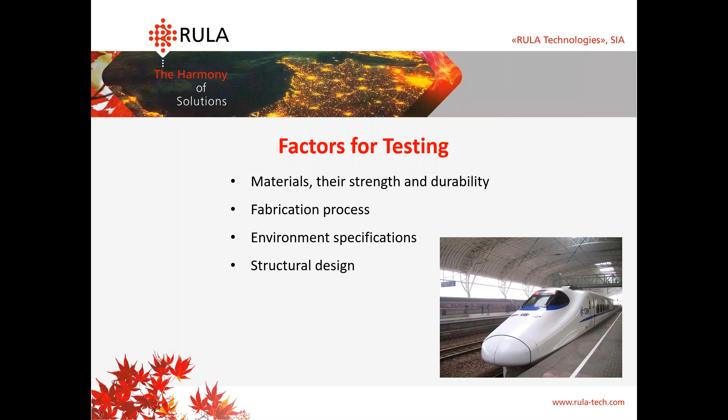There are three main ways of vibration testing in the railway industry. The first one is regular single shaker testing. It's used for single static parts like trunks, mounting, body parts, electronics. Multi-shaker testing is used for moving parts like rolling stock. And of course, we need to have an ability to apply modal analysis for structural design. It can be applied to single parts or a full train with a lot of sensors, and that way we can check the full production of the train and its parts.

Now let's talk a little bit more about the standards. The first one is IEC 61373, which certifies the equipment related to the railway industry and railway rolling stock. It guarantees resistance to shocks and vibrations. This standard has three different categories, which represent testing different parts, and these parts are separated by their train mounting. The first one is body mounting parts, the second one is bogie mounting parts, and the third one is axle mounting parts.

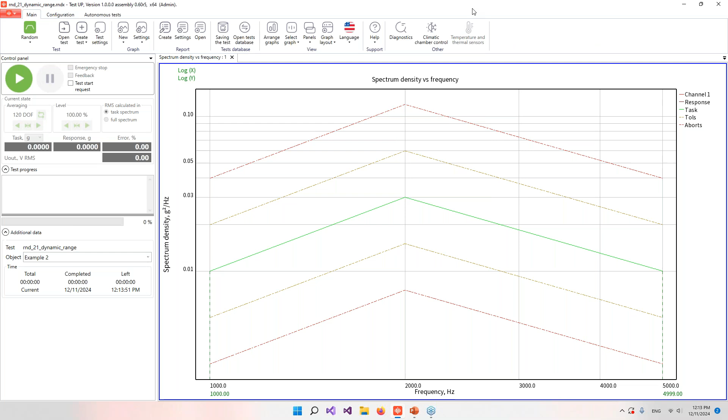And I think now we can switch to our software. And I'll turn on the camera.

Here you see that we're using our regular setup. We have our shaker with an extended shaker table, and a train model mounted on it, fixed in place. There is one accelerometer in the center of the shaker table, and another accelerometer mounted on the train. We're using a regular RL-C21 controller and RLA 200 amplifier.

Our sensors have a sensitivity of 10 millivolts per G. And here we have our software. Our first step is to create a sensor configuration.

Let's go to the configuration tab, go to channels, and add a configuration. Its name will be webinar test. Here we enter the sensitivity of the first and second channel, and we don't need settings for the third and fourth one. Their type is IEPE, so let's apply it.

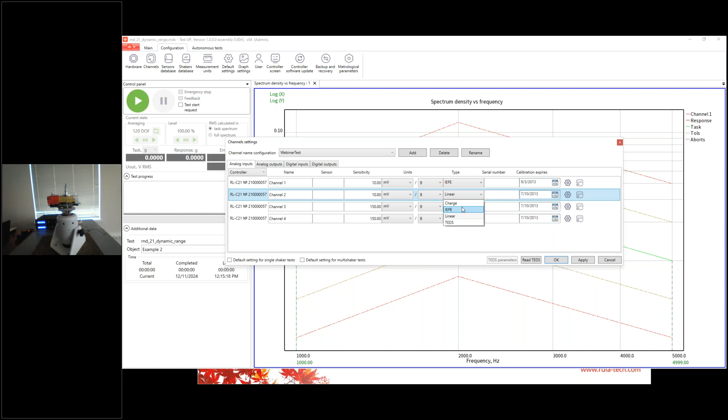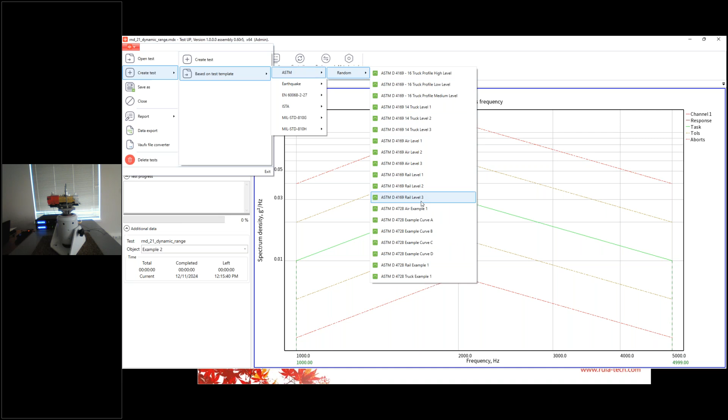Firstly, we will run a random test. It will be created by template, so we press the RULA icon, and here we have create test based on test template. We're using ASTM random rail level 3 here. Press OK.

Here you see the default profile from this standard. After that, let's go to limits and check our shaker. I think we won't run from such low frequencies.

We will move them a bit. And here you see that we have a rather low level. We'll recalculate it, but before that we need to select our channels.

Here in the channels tab, we select the webinar test configuration and disable the third and fourth channel. After that, let's apply the settings. Here you see our displacement is now in the green zone, so it won't cause any damage to our selected shaker.

After that, here I want to have an RMS of 1G, so I enter 1 and press recalculate. Here we have our profile based on the ASTM D4169 standard. It's a rail test. After that, we press OK.

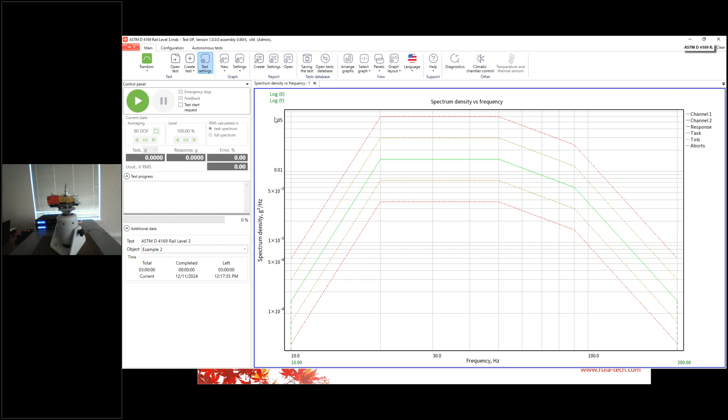And I need to set up the gain on the amplifier. Let's double check the settings. So here we have a 3-hour duration, which is too big for us. Let's set it as 1 minute.

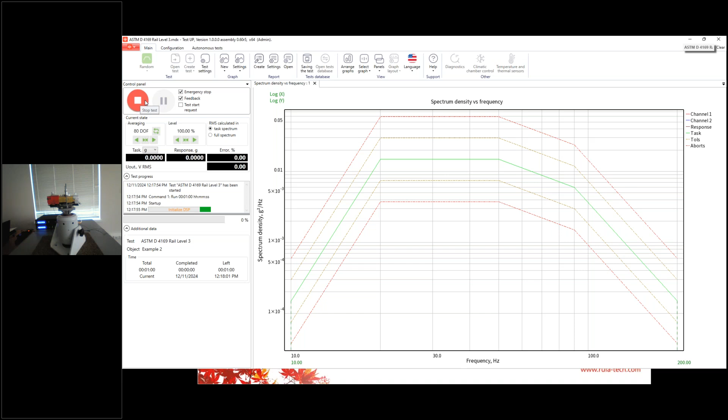And I think now we're ready to start the test. We're starting up now. I need to say that this test is really loud, so I think you will hear it.

Yeah, you see that we are running. I think you can see the vibrations. And our startup is complete.

Let's create more graphs. And you see that on the second channel, which is blue, we have a spectrum increase here. And I think maybe we will have a resonance if we go and turn levels up.

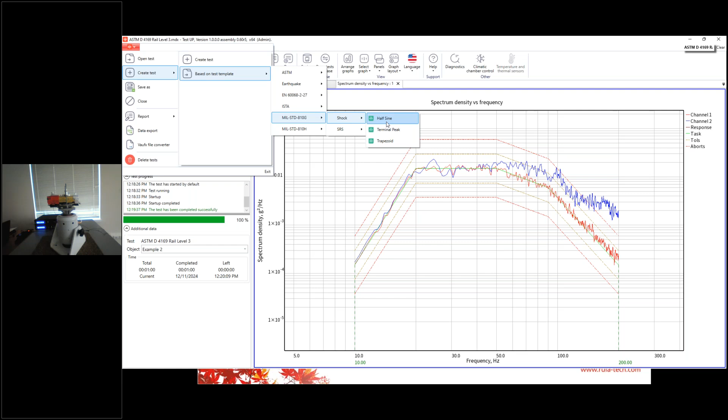Let's set a lower amplitude, it will be 1G, but I think if we need, we will manually change the amplitude. And let's make 50 shocks.

And set manual mode. After that, we go to limits, check the shaker, and you see that abort and tolerance are calculated according to this standard automatically. You will see it on the graph.

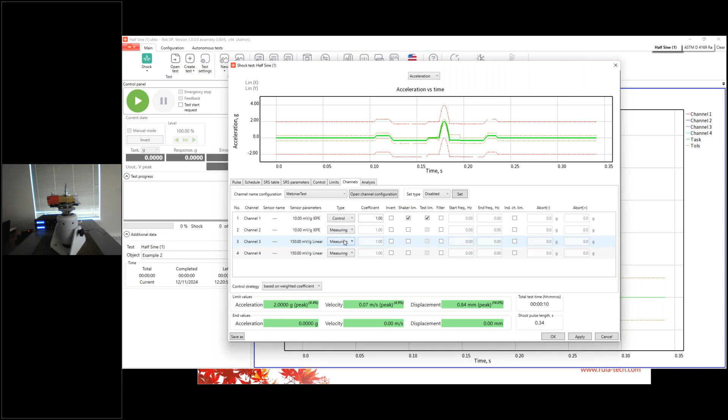After that, in channels, we select webinar test and disable these two channels. Here you see that these lines above and below the task level are calculated according to the standard. And now let's start the test.

Now we can perform the shocks. I think we can set a higher level. Let's set it back to 2G by entering 200% here.

So like this, let's create another graph. So you see that on the first channel we have our task level on the peak acceleration graph. Here we're running about 2G level, and the sensor on the top of the train has something like 7 or 8G amplitude.

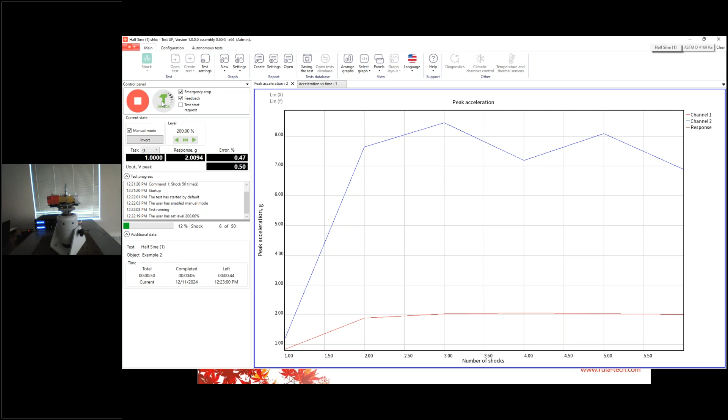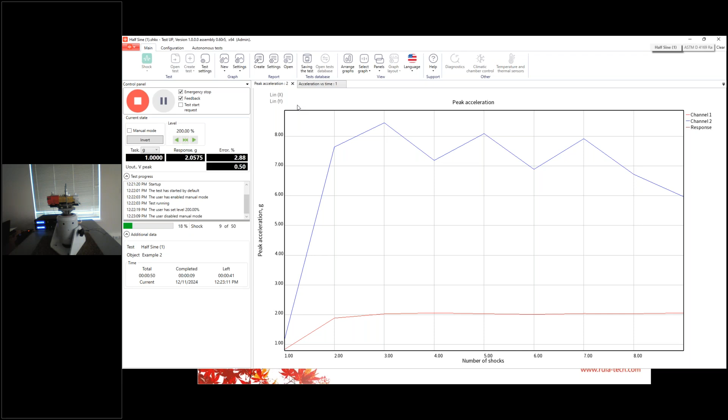And now I think let's start the test in automatic mode. Here we disable this button and we start to perform shocks in automatic mode. And let's create a spectrum.

Here you see that in frequencies above 100, the second sensor has a higher signal than the first one.

And now the test is finished and we can switch to another test. It will be sine. We will create a simple profile, but here we will go from 100 Hertz to higher frequencies and maybe find some resonances.

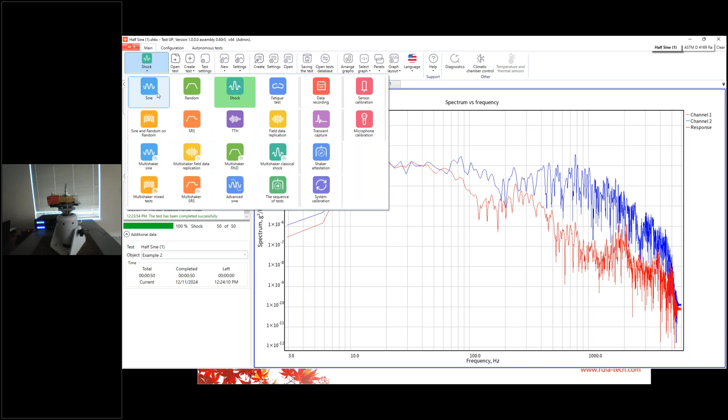So we switch to sine. Let's create a new test. Here we enter 100 Hertz, 1G level. We will go up to 1000 Hertz, also 1G level. We will run the profile.

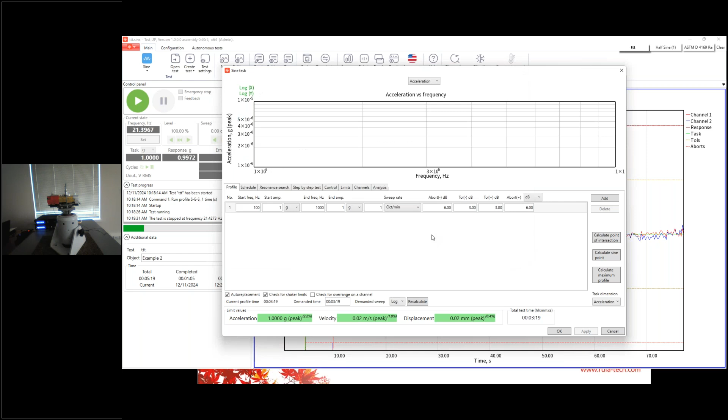Here in the channels, we need to switch to our configuration, disable these channels, check the limits, and I think now we can try to run this test. So let's start.

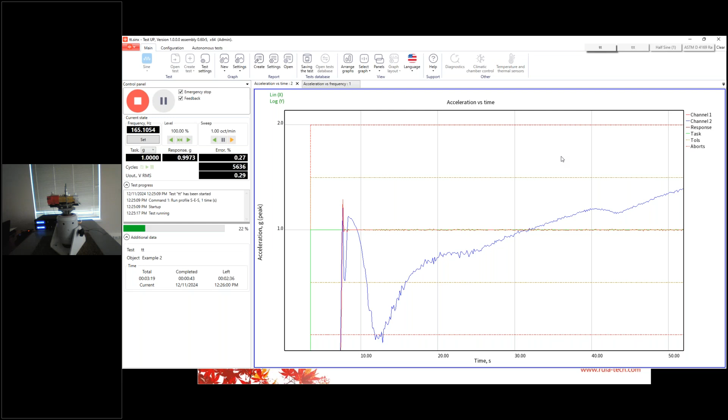And you see that the second channel is increasing its amplitude. Here you see a peak.

And it's a really noisy test. Let's add a cursor. And here, I think about 230 Hertz, we have a resonance on the top of this strain.

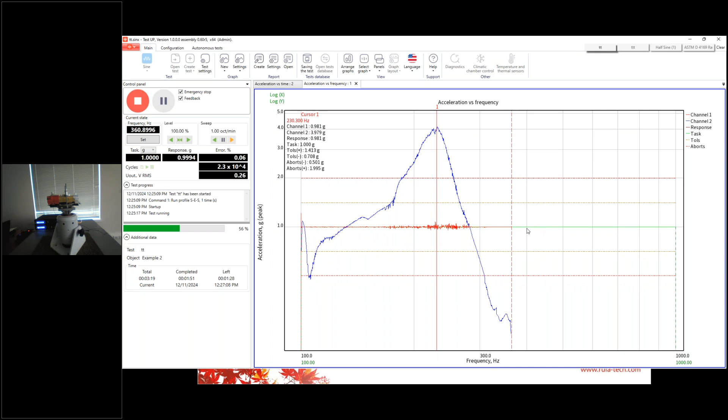And maybe we will get another one, because you see that the amplitude is increasing again. I think we can say that this point can be counted as a resonance. And another resonance.

So it was a really noisy test, but you see that we found, I think, 3 resonances, and using sine, you can have a larger frequency range profile with, for example, amplitude increase. So you can find the resonances, and using another tool, which is called fatigue test and advanced sine, we had webinars about them, you can work with these resonances, try to check the durability of your testing object, and using this test set, you can cover mostly all your needs.

I think so. So these tests that we were running during the webinar could be used also with the sequence of tests? Yes, because we have the same configuration, and maybe I'll show you an example. We press the sequence of tests. Let's create a test. So here you see run the test command, cycles from the common tests, pause and wait for user command. So here I press browse. We had random. So I select the path to this file.

I add shock, this one, and our sine test. After that, I can apply these settings. And if I press start, they will be running in a sequence like we have here in the test settings. Well, I think it was clear.

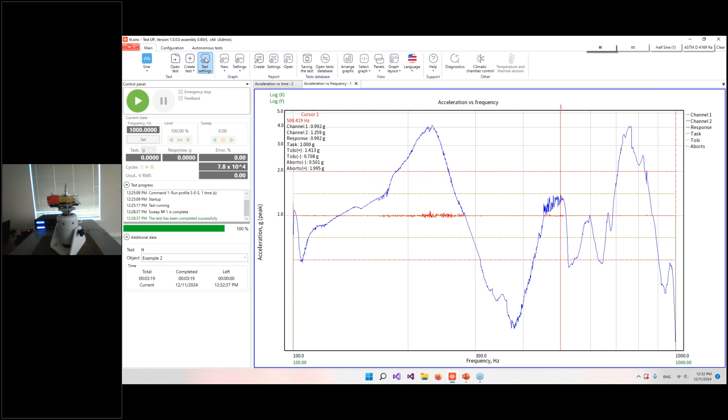Another question. Can I have multiple channels for control in single shaker tests and multi-shaker tests? I mean, multiple channels for one control loop. Using multiple channels for a single control loop is now available only in single shaker tests. Let's go to sine, I'll show you. Here in the channels, you can select other channels as control. And after that, you need to select the control strategy. That means the way the resulting control signal will be calculated.

Now, the default value is based on weighted coefficients, so you enter coefficients for the channels, and after that, we calculate the average according to these coefficients. For example, if we know that the first channel is placed on the shaker's table, it doesn't have any influences from our testing object, but the second channel is placed, like here, on the top of the train, it can have resonances. We know that the signal from the first channel is clearer than the signal from the second one. So we enter the higher coefficient value, and that means that the channel is more clear and is going really close to our profile line.

Also, we have maximum and minimum. That means that from all control channels, we select the value with this parameter, maximum or minimum. As for multi-shaker tests, now we don't have the ability to have multiple control sensors for a single loop, but I think in future releases we'll have this option. Now you can have only multiple axes and multiple control loops which are connected to these axes, and I think now it can cover all our customers' needs, but as for research and user requests, maybe in future we will have this option.

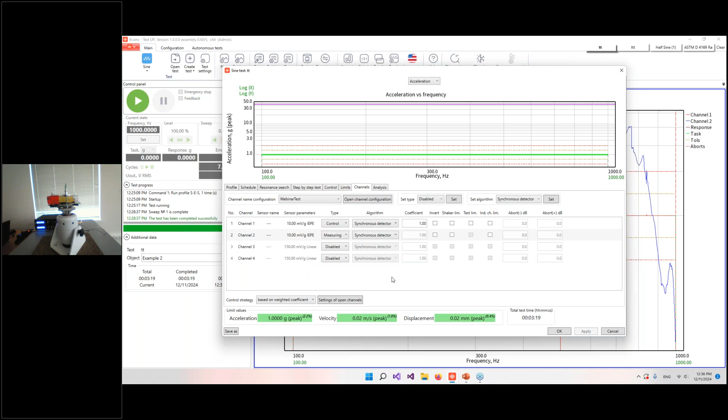So today we talked about vibration testing and its usage during the production steps in the railway industry. We can apply all RULA devices and software for all types of testing, and if you're not sure if something is compatible or acceptable for such tests, you can write us an email. We will give a brief and detailed explanation for you, or maybe give you some support in the selection of the equipment. And we talked about the standards and made examples of vibration tests. So now you know how vibration tests are used in the railway industry.